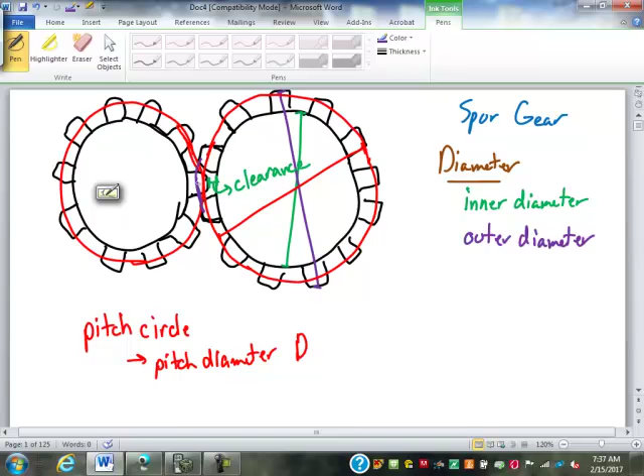The depth that the tooth goes into the next gear. For example, these teeth come in, so it's the outer diameter of this circle here. From the outside of this tooth into that spot, the depth that that tooth penetrates is what's called the working depth.

The distance from the outside of the tooth all the way in, that's called the whole depth. Whole as in complete, not hole as in a drilled hole. So those are the basics of the gears meshing together.

Next, we have to look at something called the addendum and the dedendum. From this pitch circle, you can see there's a piece of the tooth that sticks out outside of the pitch circle. I didn't draw my teeth very well here. I just did the ones where they mesh, and the rest of them I drew pretty sloppy. That is called the addendum. It is outside of the pitch circle to the outside of the tooth.

The inside of the pitch circle to the inside of the tooth, or to the inner diameter, that is called the dedendum.

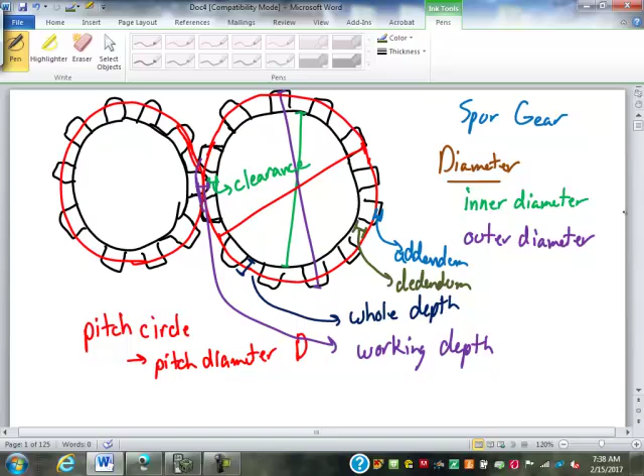Now, if we want to figure out what the pitch diameter is for two gears, pretend those look like circles. Now I'm just going to draw my teeth blocky here. Like this. Pretend those teeth look like they'll mesh and not break off.

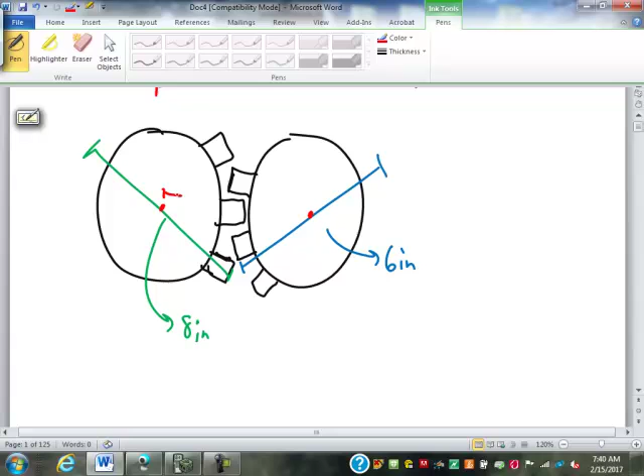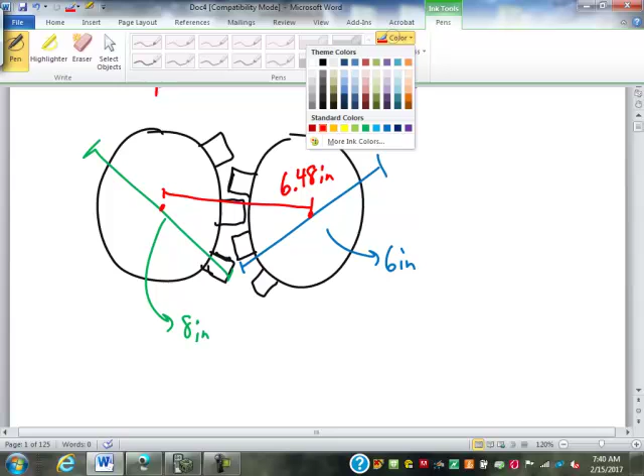So anyway, let's say we have the outer diameter of one gear is 6 inches. And the outer diameter of the other gear is 8 inches. If I give you then that the center to center distance between the gears is, oh, what's that going to be? 3, 4, 6.48 inches. We can use that information to calculate a working depth.

The working depth is the difference between if the two gears were just touching the ends of their teeth and what the center to center distance is when the gears are meshed together. If the gears were just touching at the outside of their teeth, the distance between centers would be the radius of this gear plus the radius of that gear, right?

So what's the radius of this gear? Well, the radius here is 3 inches. Radius of this one is 4 inches. So that would make that center to center distance, the sum of the two radii, 7 inches. But the actual center to center distance is 6.48. So we subtract those two and we get 0.52 inches is the working depth.

Does that make sense? So that is how far these teeth overlap here. It's 0.52 inches. Any questions on that? Does that make sense? Yeah.

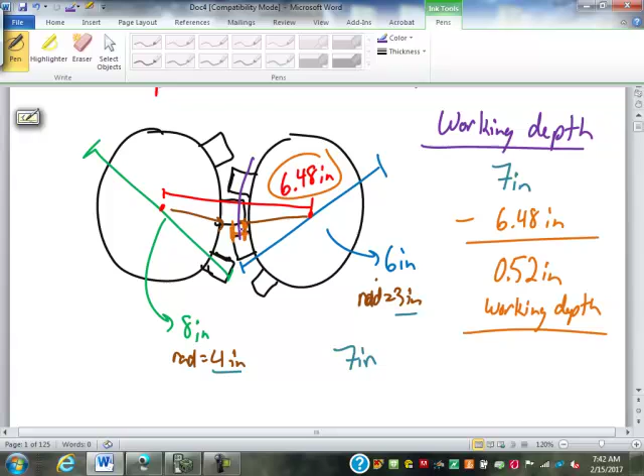So knowing that working depth allows us to find the pitch diameter. If I take that working depth, the pitch circle for each of these gears is going to fall in the middle of that working depth. It's going to cut right through the center of that, like that. So half of that working depth is going to get subtracted off of each radius. Does that make sense?

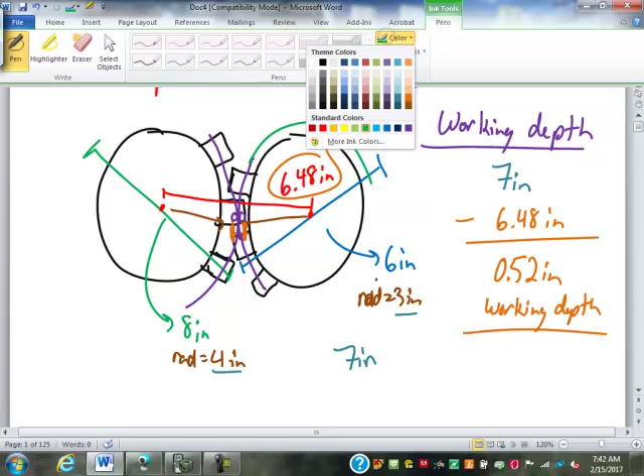But now that's the radius. How much are we going to lose off the diameter? Well, we're going to lose the same on the other side as well. So the pitch diameter for one of these gears is equal to the outer diameter minus the working depth.

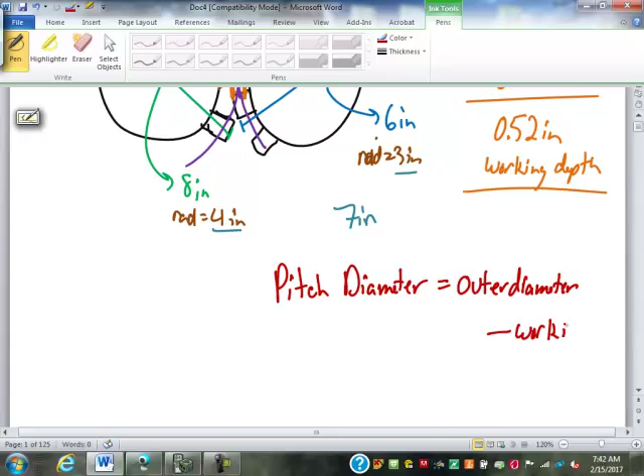So the pitch diameter for this gear here, it's 6 inches minus the 0.52. That's going to be a 5.48 inch pitch diameter. Here, 8 inches minus the 0.52. That's going to be a 7.48 inch pitch diameter.

Why am I spending so much time talking about pitch diameter? Well, because something called the, what's that? Pitch is used on threads. It's also used on gears. Two threads have to have the same pitch to mesh together. Two gears have to have the same pitch to mesh together too.

In a gear, what the pitch describes is how far the teeth are apart, how the teeth are spaced, and how wide they are. Two gears must have the same pitch or they won't mesh together. You take two gears and they may seem to mesh together, but if their pitches are slightly off, when they get up to high speeds, they're going to either lock up or chip out, bust teeth out.

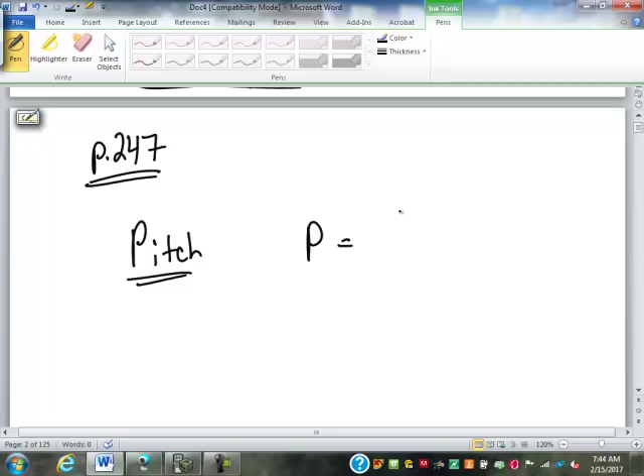So in that packet I gave you yesterday, we were talking about cutting speeds. Starting on page 247 of that packet, there's a table that goes through all of these quantities of a spur gear and how they all fit together. So for example, the pitch of a spur gear, which is going to be abbreviated with a P. Pitch is the number of teeth divided by the pitch diameter of the circle. So N is number of teeth. D is the pitch diameter.

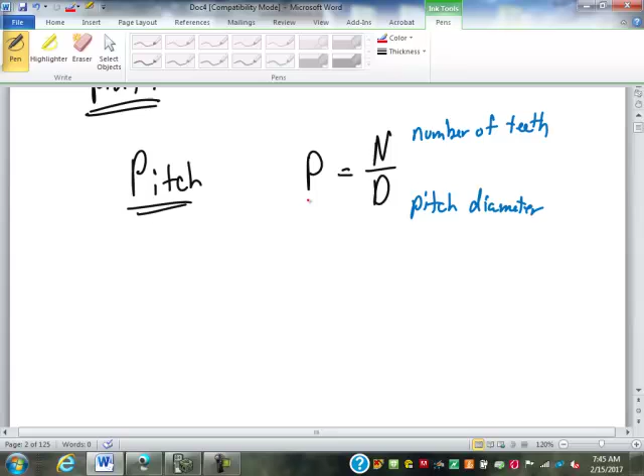Now, P here, the pitch, is sometimes referred to as the diametral pitch, but that is just the pitch. That's what its common name is anyway. There is something called the circular pitch. The circular pitch describes the distance.

See, I have my teeth here. What circular pitch is describing is the distance from the center of one tooth to the center of the other at the surface of that pitch circle, of that pitch diameter. So it's not at the outer. Notice I didn't draw that in at the very outer edge. It's not the inner edge. It's at that pitch circle.

And that can be found by taking pi times that pitch diameter, divided by N. So P with the little c by it is circular pitch. So pi times your diameter is the circumference of the pitch circle, divided by your number of teeth. That would be the distance, dividing it up per tooth, the distance between teeth.

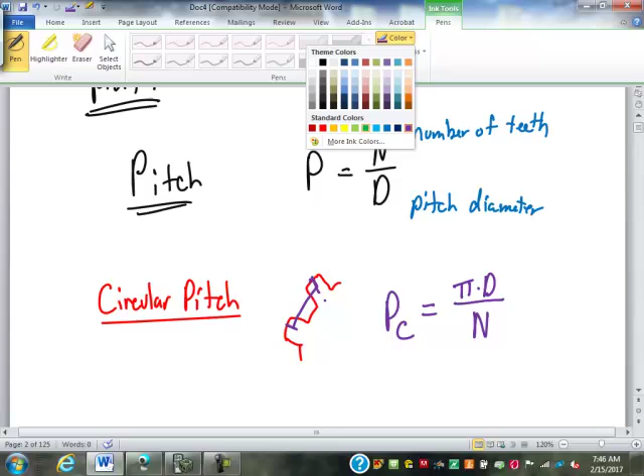Or, you know that N over D is the pitch. So 1 over the pitch is D over N. So I replace D over N with 1 over P. So that's just pi over the pitch. Now in your packet they use 3.1416. We all know that that's just pi.

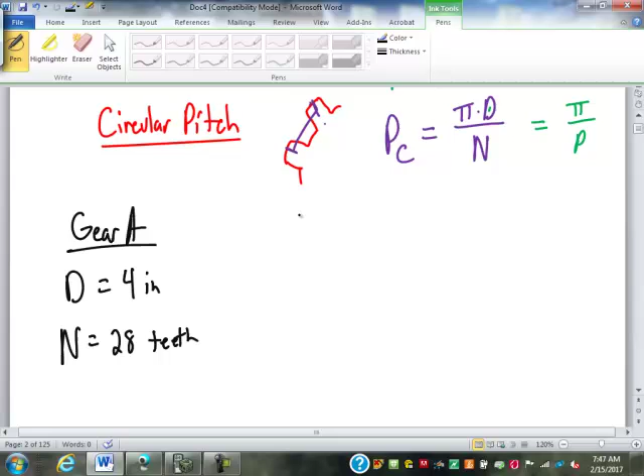So let's say we have 2 gears. Gear A has a pitch diameter of 4 inches and has a number of teeth of 28 teeth. Gear B has a pitch diameter of 7 inches. How many teeth would gear B have to have for these 2 gears to mesh?

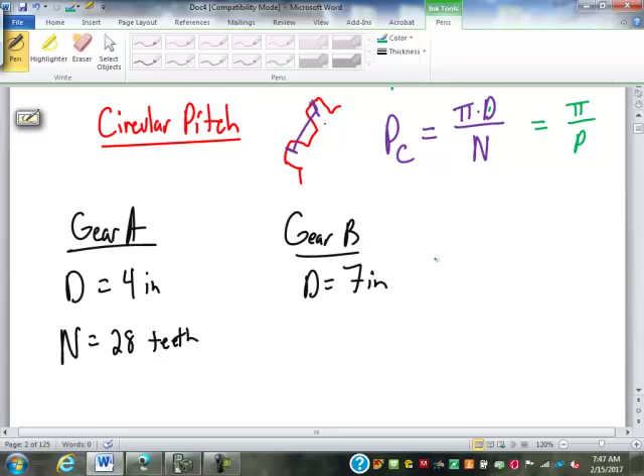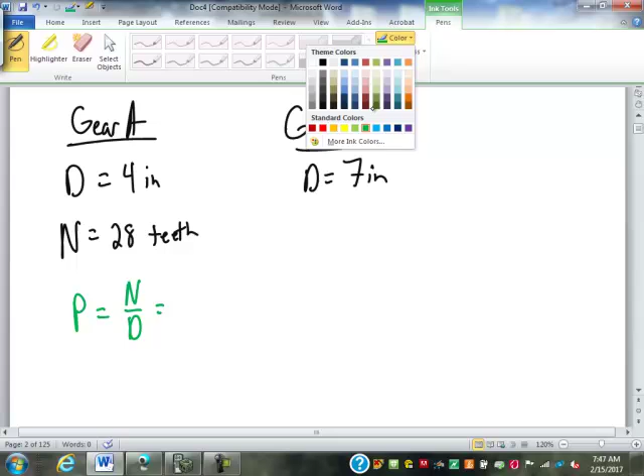Well, let's find the pitch of gear A. Remember, D is pitch diameter. The pitch is N over D, so number of teeth over that pitch diameter. This is 28 teeth over a 4-inch pitch diameter, which would give us a pitch of 7 teeth per inch. So it's a 7-pitch gear, which means that this gear must have a pitch of 7 as well.

So to figure out what that number of teeth has to be, pitch has to equal the number of teeth over the diameter. Our pitch has got to be 7. We're looking for N, and D is a 7-inch diameter. So how do I find N here? Well, N has been divided by 7, so to get rid of the 7, we multiply by 7. 7 by 7 is 49. So that gear has to have 49 teeth if those 2 gears are going to mesh properly, to have the same pitch.

Okay. Now there are other formulas. The packet, like I said, starting on page 247 there and continuing for a couple pages, has several formulas. Most of them are just rearranging, like the pitch diameter, which is just D. Well, that can be found since the pitch is found by the number of teeth divided by the diameter. If you just rearrange that formula, D is equal to the number of teeth divided by the pitch.

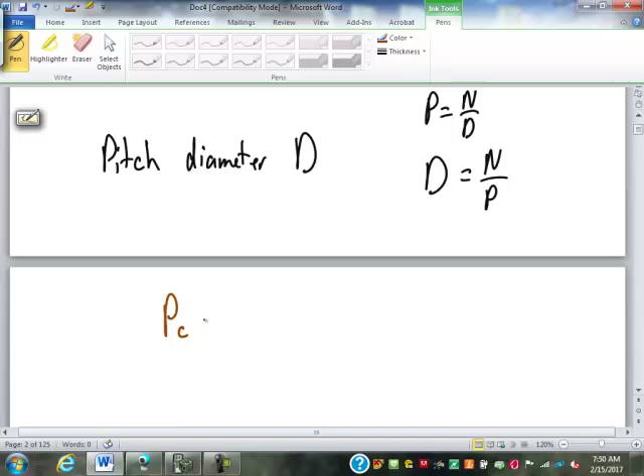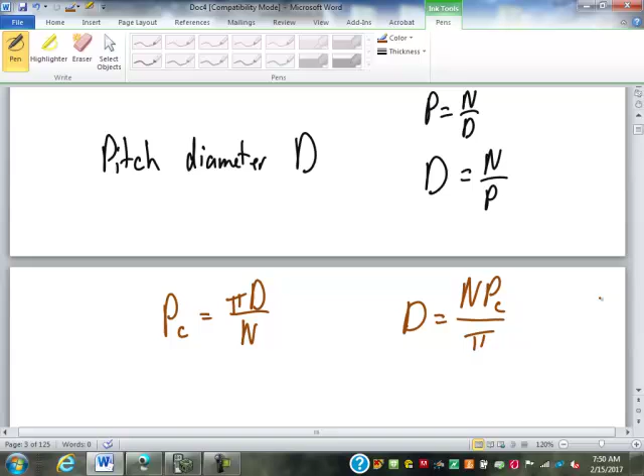Or you could rearrange that circular pitch formula. Remember, given PC is equal to pi D over N. We could solve that for D. D is equal to N PC over pi. But those are all things you guys can do. We had algebra last semester. You guys can rearrange those formulas on your own. I want to take a look at some of the other formulas that may not be quite as obvious from the others.

Outside diameter. This is going to be D with the O on it. Remember, D by itself is the pitch diameter. D with the O is the outside diameter. We tend to not really use the inner diameter for any of these calculations. But the outside diameter for most gears is going to be N plus 2 divided by the pitch. The clearance on a gear tends to be a function of its pitch diameter and number of teeth. So the pitch diameter is the number of teeth divided by the pitch. The outside diameter would be basically what you would need for 2 extra teeth.

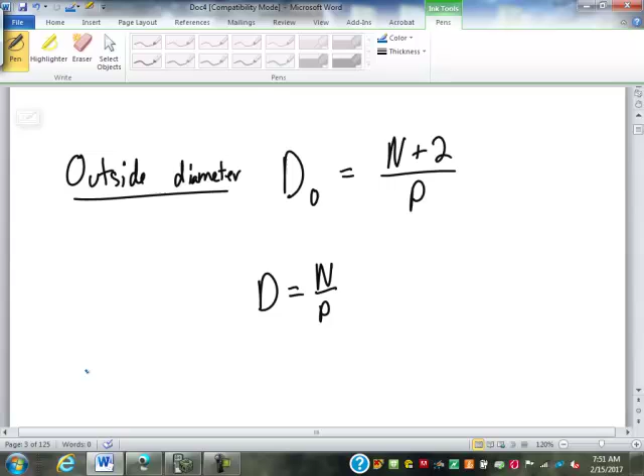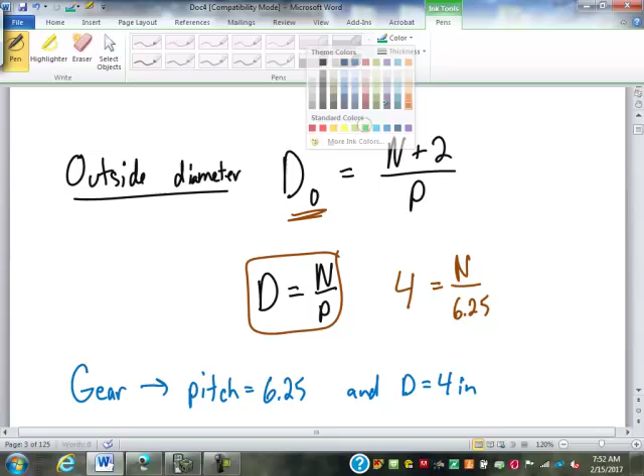So let's say that we have a gear that has a pitch of 6.25, and let's say it has a pitch diameter of 4 inches. To find what the outside diameter would be off of that gear, we're going to start with this formula here. We're going to put 4 in for the pitch diameter. N is what we're looking for, the number of teeth. P, the pitch, is 6.25. Solving for N there, multiply by 6.25. Got 25 equals N. So that gear has to have 25 teeth.

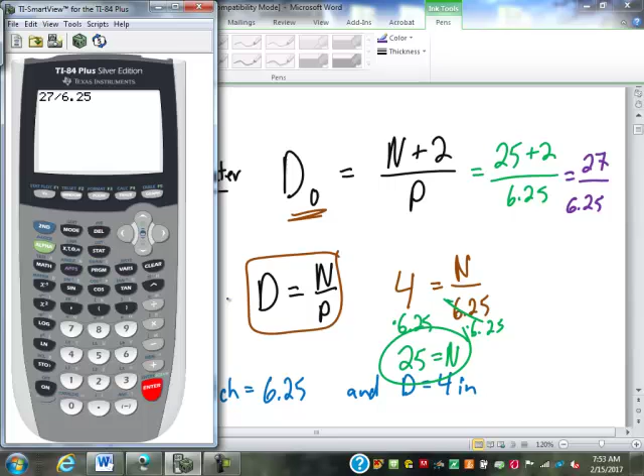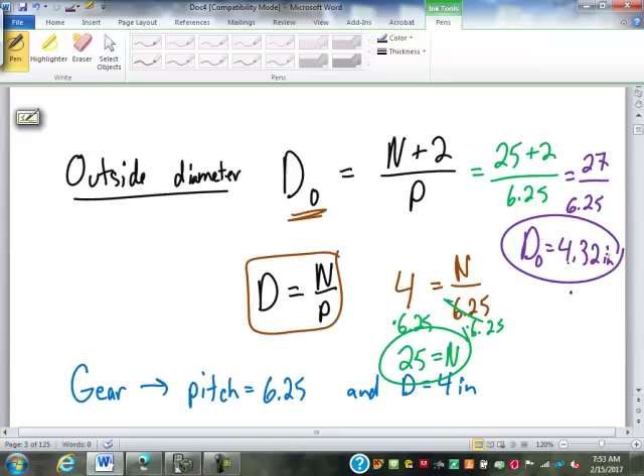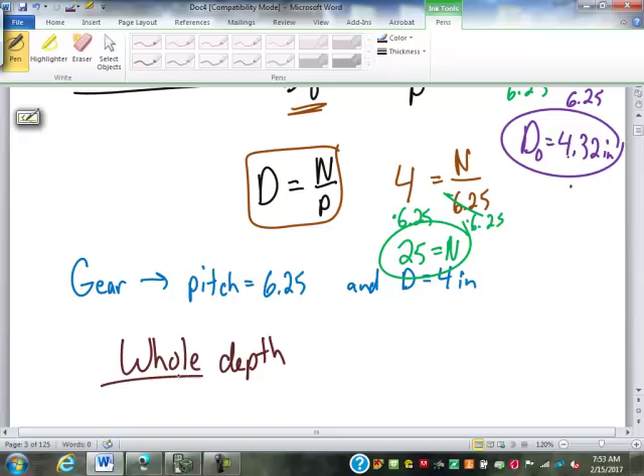Now that we know that, we can find the outside diameter by putting 25 up here, 25 plus 2, over the pitch of 6.25. So 25 plus 2 is going to give us 27, divided by 6.25. That outer diameter should be 4.32 inches. What that means, again, is that the teeth are sticking out how far? What would be the whole depth? So let's think about this. We've got a pitch diameter of 4 inches, and we've got an outside diameter of 4.32 inches.

The whole depth, remember,

I really do need to improve my artwork at some point in my life. Not going to be today.

The whole depth is from the outside of the tooth to that inside diameter. That's our whole depth. Now the outside diameter goes all the way out. That's the 4.32. The pitch diameter, the 4, goes from here to here. Do we have enough information there to find the whole depth yet? No. We can, however, find the working depth.

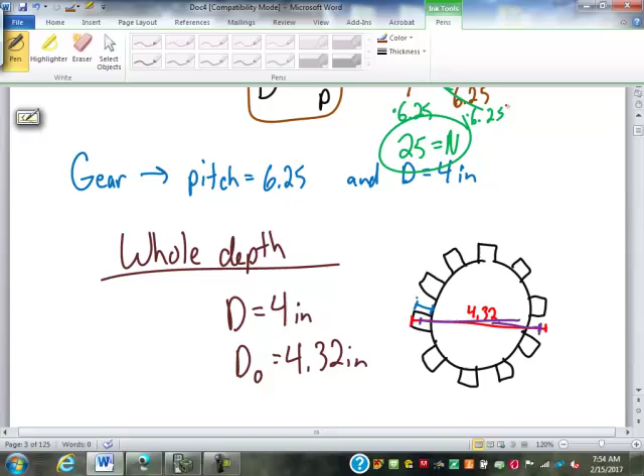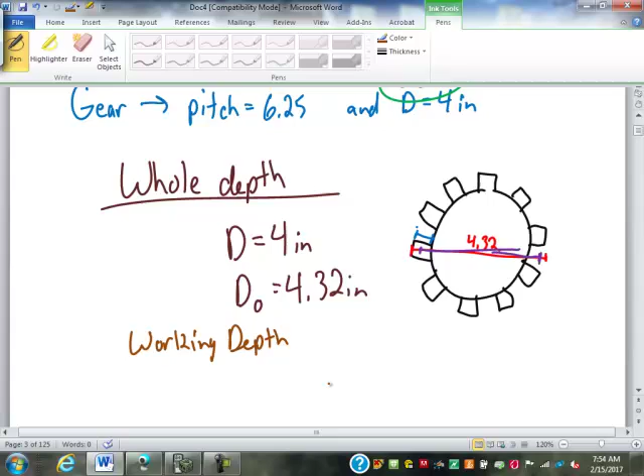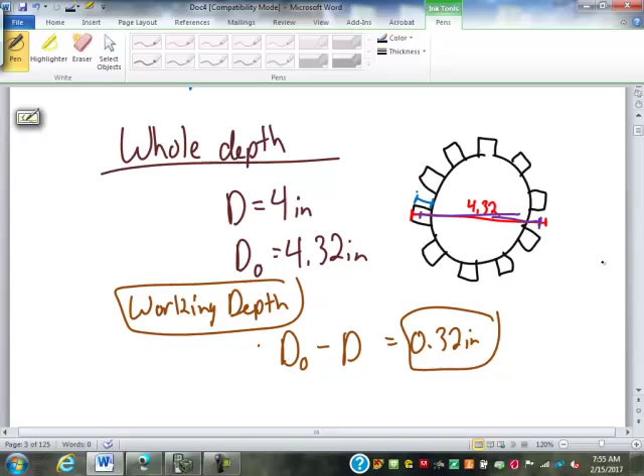The working depth is always going to be the difference between the outside diameter and the pitch diameter. So the working depth here is going to be 0.32 inches. If I knew the clearance, I could then find the whole depth. So I would have to know the inner diameter to have a perfect clearance.

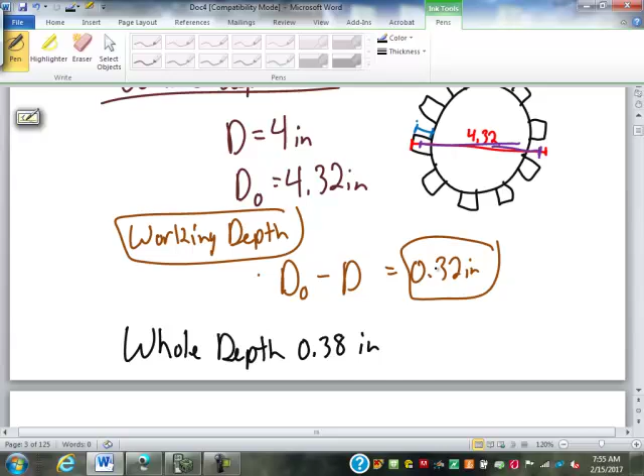If I give you that the whole depth is 0.38 inches, the clearance has to be the whole depth minus the working depth. So 0.38 minus 0.32 gives us 60 thousandths, or 0.06 inches of clearance. What do you guys think?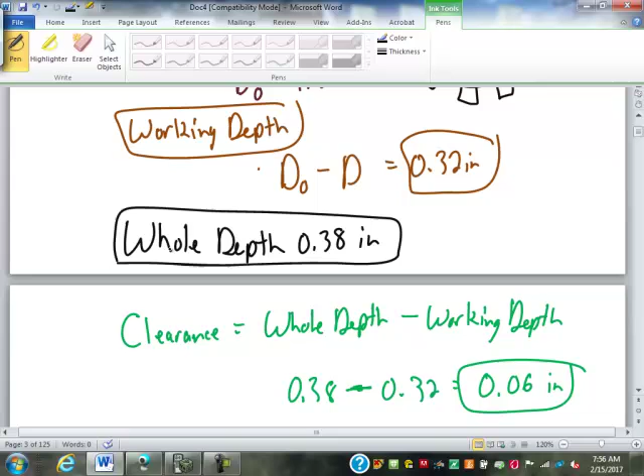The whole depth, I had to give you that. That had to be given information. Now if you look on page 248 in your packet, there are some of the items in that table that have an asterisk by them. Generally, it's starting with the addendum and working mostly all the way down to the clearance. This formula for the clearance is always true. They're not using that one in the book because it's not very often you have both the whole depth and the working depth. Usually you have the pitch or the pitch diameter. They're also using the circular pitch.

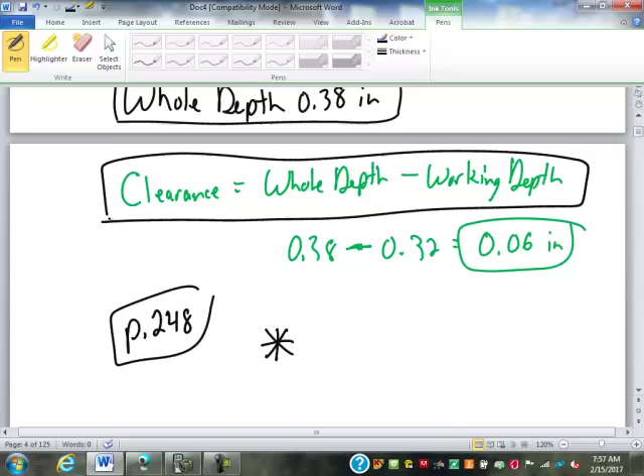Those that have that asterisk by them, like I said, from the addendum down to the clearance, those formulas only work for certain types of gears. The note on bottom says for a 14.5 degree involute and full depth gear. This is 248. All that is saying a 14.5 degree, that is the spacing between teeth. 360 degrees is a full circle. That's 14.5 degree spacing from tooth to tooth, which is another way of describing the pitch.

So just know that those with the asterisks by them, we're going to use those formulas for everything we do. But in practice, those only apply to certain types of gears that meet certain classifications. Okay, so you start at the addendum there. If you look over on the far right side of that table, addendum is like the third or fourth one from the top. On the left column, it says outside diameter, root diameter, then addendum. Follow that over to the right side of the table. There's an asterisk by those formulas. And you go down the table, the next 5 or so have those asterisks by them.

Those only apply to a 14.5 degree involute gear. Most gears fit that qualification, so it's not a big deal. But I just put that in there to make sure that you know that's not an absolute formula. The other ones are always absolute. The ones with no asterisks apply to any spur gear. But those only apply to certain special classifications of gears.

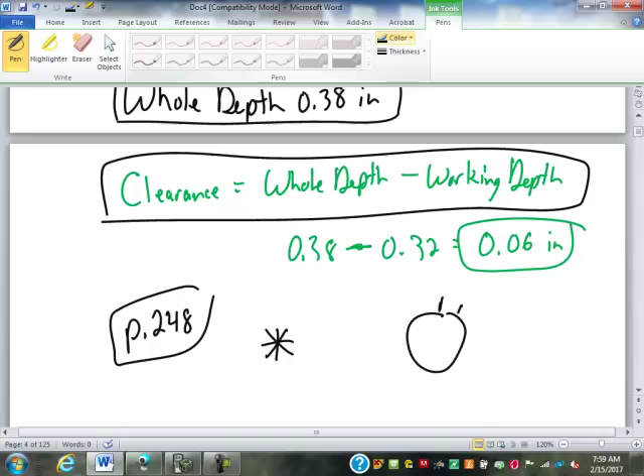Okay, what I want you guys to work on, I've been cutting you guys pretty short of work time lately. So in this packet, page 251 through 252, I want you guys to work on 1 to 53 the odd. This is mostly just a practice of picking the information out. The first several is just a table, so it's fairly easy. But the next couple sections are a practice of picking out the information that you have, finding a formula that contains that information, and then applying that formula. And it's a skill. It's not as easy as it would look.

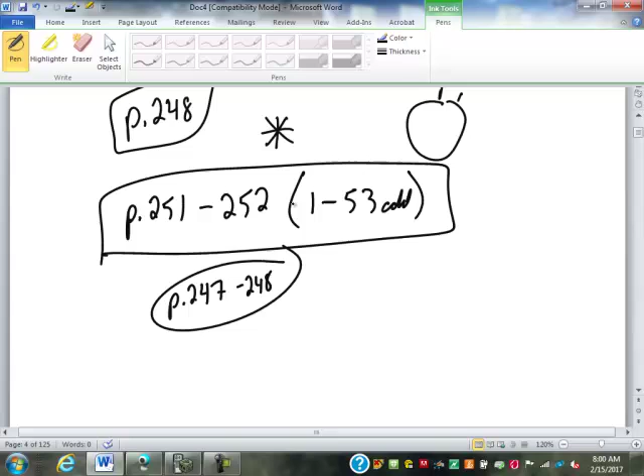The first set's fairly easy because it's straightforward. What it's asking you for, you can go look at that table. Remember, that table is on page 247 and 248. It should have a formula right in that table that gives you that. Some of the others, you'll have to find a formula in that table that uses that as one of the inputs, and you have to solve the equation. So you have to work some of them backwards to get to those amounts. So I'll let you guys have the last 20 minutes to get started on those.